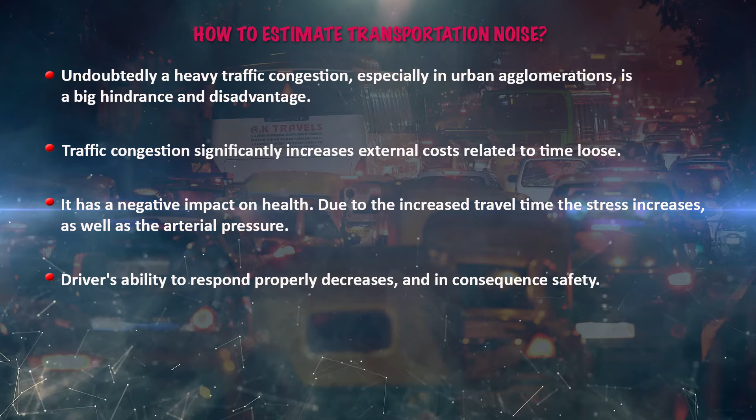Due to the increased travel time, the stress increases and also the arterial pressure increases. So the driver's ability to respond properly definitely decreases, and in consequence there is a safety issue. So these are the factors involved in the transportation sector. Although these effects of congestion, resulting from excessive traffic, poor traffic management and sometimes drivers' errors, are difficult to measure, many efforts are made to improve traffic flow, especially in urban areas.

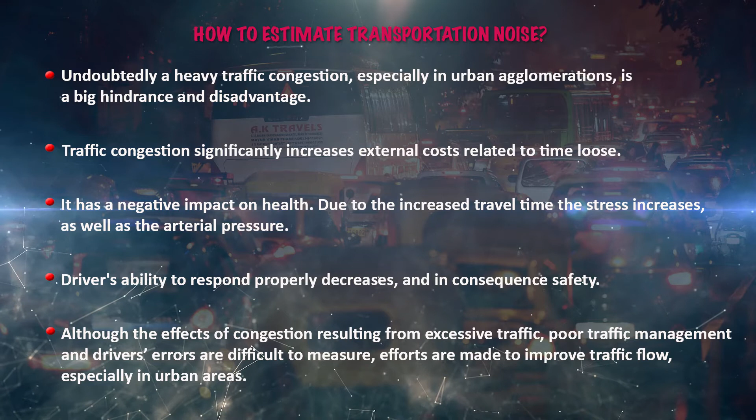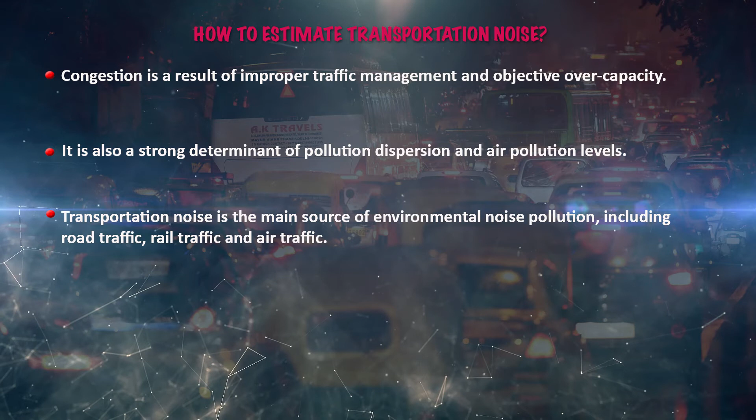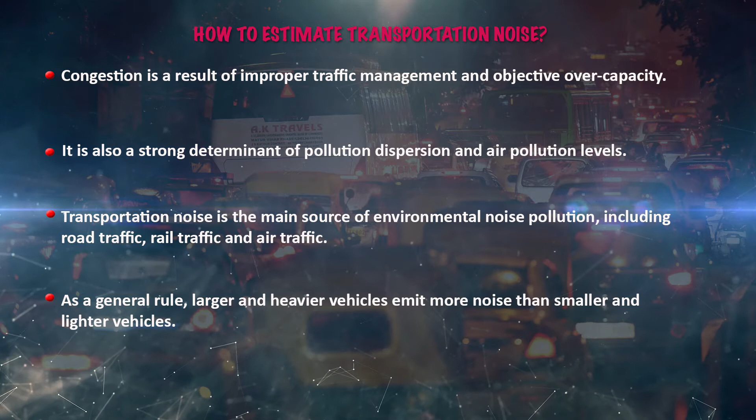Congestion is a result of improper traffic management and objective overcapacity. It is also a strong determinant of pollution dispersion and air pollution levels. So transportation noise is the main source of environmental noise pollution, like road traffic, railway traffic and also air traffic. There is a general rule that larger and heavier vehicles emit more noise than smaller and lighter vehicles. Some exceptions are there, like helicopters and 2 and 3 wheelers.

The noise of a road vehicle is mainly generated from the engine and also from frictional contact between the vehicle and the ground and air. And in general, road contact noise exceeds engine noise at speeds higher than 60 km per hour. The physical principle responsible for generating noise from the tire road contact is less well understood, that means it is not properly studied.

The sound pressure level from traffic can be predicted from the traffic flow rate, the speed of the vehicles, the proportion of heavy vehicles and the nature of the road surface. Special problems will arise in areas where traffic movements involve a change in engine speed and power, like traffic lights, hills and intersecting roads. Sometimes it may be topography, meteorological conditions and low background levels which are unfavorable, like mountain areas.

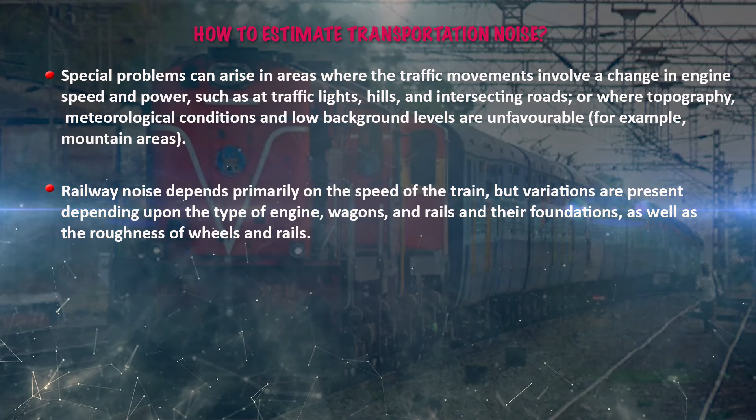Railway noise depends primarily on the speed of the train, but variations are present depending upon the type of engine, type of wagons, rails and their foundations, and the roughness of wheels and rails. It is very interesting to know that small radius curves in the track, like those for urban trains, can lead to very high levels of high frequency sound, known as wheel squeal. Noise can be generated in stations because of running engines, whistles and loudspeakers, and in marshalling yards because of shunting operations.

The introduction of high speed trains has created special noise problems with sudden but not impulsive rises in noise. At speeds greater than 250 kilometers per hour, the proportion of high frequency sound energy increases, and the sound can be perceived as similar to that of overflying jet aircraft. Special problems can arise in areas close to tunnels, in valleys, or where ground conditions help to generate vibrations. Long distance propagation of noise from high speed trains will constitute a problem in the future if environmentally friendly railway systems are expanded.

Aircraft operations generate substantial noise in the vicinity of both commercial and military airports. Aircraft takeoffs are known to produce intense noise and vibration, as well as rattle sound sometimes. The landing procedures also produce substantial noise in long, low altitude flight corridors.

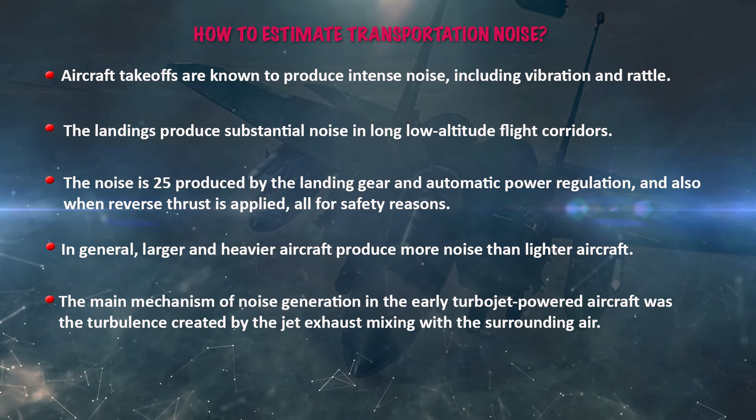So the main mechanism of noise generation in the early turbojet powered aircraft was the turbulence, which is created by the jet exhaust mixing with the surrounding air. This noise source has been significantly reduced in modern high bypass ratio turbofan engines that surround the high velocity jet exhaust with lower velocity airflow, which is generated by the fan.

So the fan itself can be a significant noise source, particularly during landing and also taxiing operations. Multi-bladed turboprop engines can produce relatively high levels of tonal noise. The sound pressure level from aircraft is typically predicted from the number of aircraft, the type of airplanes, their flight paths, the proportions of takeoffs and landings, and the atmospheric conditions.

So severe noise problems may also sometimes arise at airports hosting many helicopters or smaller aircraft used for private business, flying, training, and sometimes leisure purposes. Special noise problems may also arise inside airplanes because of the vibration. The noise emission from future superjets is of course unknown.

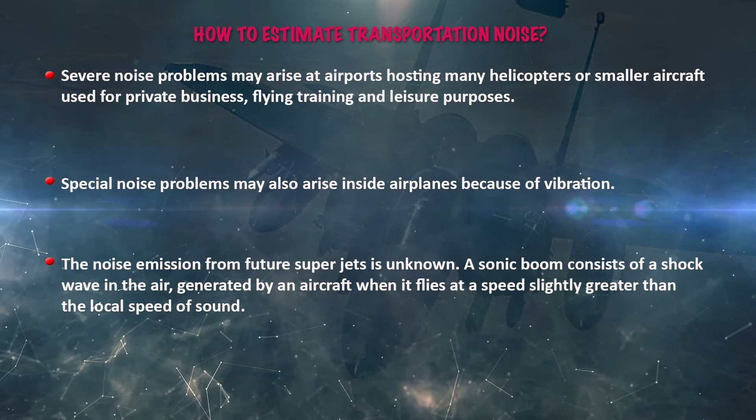So a sonic boom consists of a shock wave in the air which is generated by an aircraft when it flies at a speed slightly greater than the local speed of sound. An aircraft in supersonic flight trails a sonic boom that can be heard up to 50 kilometers on either side of the ground track, depending upon the flight altitude and the size of the aircraft. A sonic boom can be heard as a loud double boom sound. At high intensity it can damage property.

The noise from military airfields may present particular problems compared to civil airports. For example, when used for nighttime flying, for training interrupted landings and takeoffs, that means touch and go, or otherwise for low altitude flying. In certain instances, like wars or specific military activities, they will introduce other intense noise pollution from heavy vehicles like tanks, helicopters, and also small and large firearms.

So there are 5 types of transportation noise estimation. The first one is internal combustion engine noise prediction. When the internal combustion engine is working, it generates a lot of noise in the surrounding environment. Noise can disturb people's daily life and even endanger people's health. So noise has become a growing concern of society. When people are exposed to noise for a long time, it can cause insomnia, cardiovascular diseases, and sometimes death.

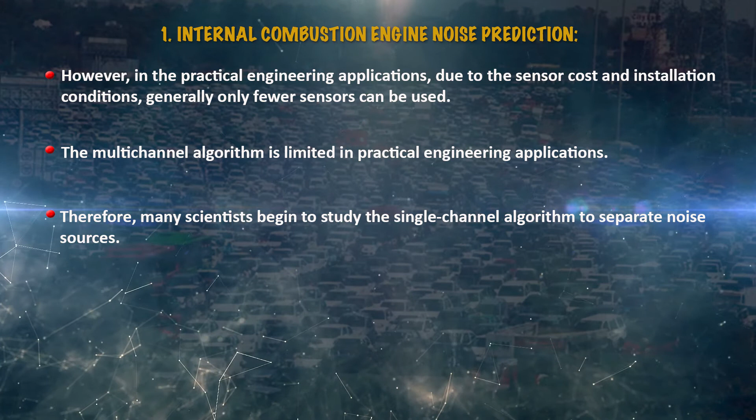The Global Legislative Committee is developing strict regulations to make ships, cars, and other transportation vehicles quieter. However, in practical engineering applications, due to the sensor cost and installation conditions, generally only fewer sensors can be used. So the multi-channel algorithm is limited in practical engineering applications. So many scientists began to study the single channel algorithm to separate noise sources.

For example, Du et al. used empirical mode decomposition, EMD, and independent component analysis methods to separate the combustion excitation signal and the piston slap signal. Another mode is the ensemble empirical mode decomposition, EEMD, which is a noise assisted data analysis method that adaptively decomposes signals based on the local characteristics of signals. All complex signals are composed of multiple simple intrinsic mode functions, IMF, and each IMF is independent.

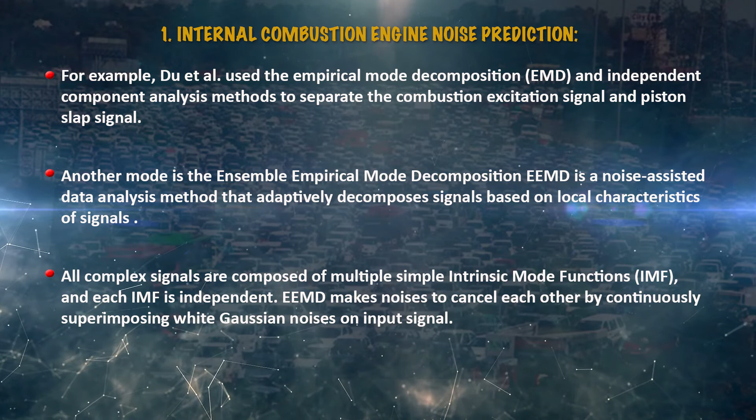EEMD makes noise cancel each other by continuously superimposing white Gaussian noises on the input signal. In this way, this method can decompose different scales or trend components that really exist in the data time series step by step and generate data sequences with the same characteristic scale size, and the additional noise is gradually eliminated one by one, and the final result of denoising is the signal itself, because it is the only durable and stable part of the EEMD.

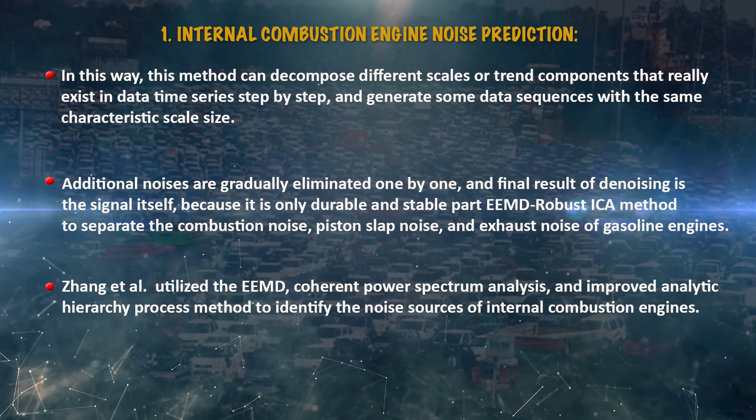The next one is the robust ICA method to separate the combustion noise, piston slap noise and exhaust noise of gasoline engines. They utilize EEMD coherent power spectrum analysis and an improved analytic hierarchy process method to identify the noise sources of internal combustion engines. And in some cases, EEMD and generalized transform methods are employed to separate the combustion noise, piston slap noise as well as gear noise.

The second method we have to look into is exhaust and intake noise prediction. Intake and exhaust noises are the most significant sources of exterior vehicle noise. The intake and exhaust noise sources are divided into primary noise sources, where pressure fluctuations in the manifolds propagate to the exhaust tailpipe or intake orifice and are radiated as noise, caused by the primary noise source, that is, the unsteady mass flow through the valves.

So the system responsible for engine breathing or primary noise is similar, as it is suitably harnessed to improve the volumetric efficiency of the engine by wave action tuning. And the secondary noise sources, that is, the flow motion through the intake and exhaust systems, are responsible for secondary noise. This self-induced noise we normally call flow noise.

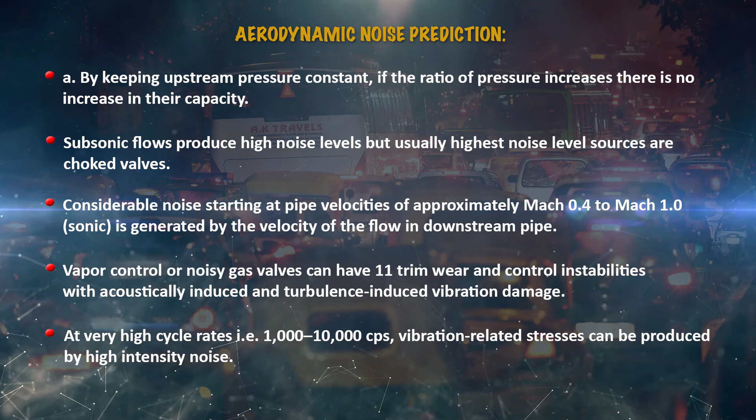So here we have to consider vapor controls also. That means vapor control, we can also say noisy gas valves, can have trim wear and control instabilities with acoustically induced and turbulence induced vibration damage. So at very high cycle rates, that is 1000 to 10,000 CPS, vibration related stress can be produced by the high intensity noise. Valve service life can be drastically reduced by the noise induced damage, and in some cases it may be responsible for valve or piping failures quickly, in minutes or hours.

And also we have to see brake noise prediction. So brake noise has been an issue of concern to vehicle manufacturers, because brake noise can be categorized into 4 basic categories. First one is brake squeal, that has a tonal character, with components above 1000 hertz, or it can exceed that limit.

And then brake moan, that occurs at moderate speed and is characterized by 100 hertz frequency components. And the third one is brake creep groan, that is characterized by frequency components of approximately 100 hertz and it occurs at speeds less than walking pace. And the fourth one is brake judder. It is characterized by frequency components of about 10 hertz, at speeds less than walking pace.

So all four categories of brake noise are because of the pairing of friction surfaces at the rotor disc and the pad. So the disc, the pads and the caliper, 3 of them in assembly, are the brake components that radiate brake squeal noise. In the case of brake judder, moan and creep groan, the resonant frequencies of the brake components are usually less than 1000 to 2000 hertz. So the vehicle suspension acts as a resonating system. So with all these specifications, we have to understand that there are so many methods in practice for noise as well as vibration impact.